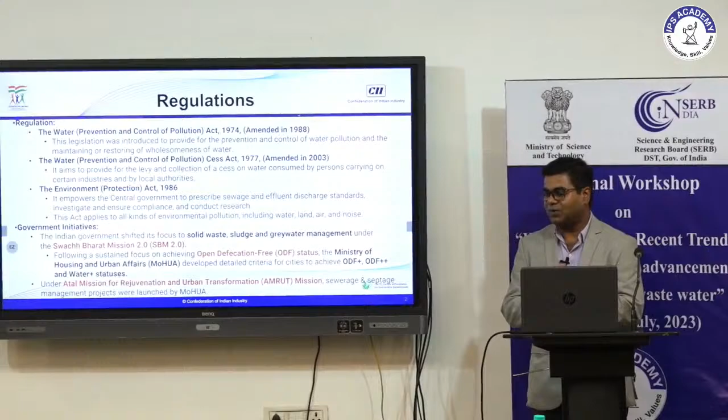So, does anyone know about the difference between different kinds of policies? What is an act, what are rules, what are guidelines, and who made it? If anyone can tell me, what is an act and what are rules, and what is the difference between acts and rules? Anyone? Have you gone through that or thought about that?

No one. No problem, this is the time. Even I didn't know that - I used to think act and rules are the same thing, just people say like that, acts and rules. Then when I grew with the subject, I realized there are differences.

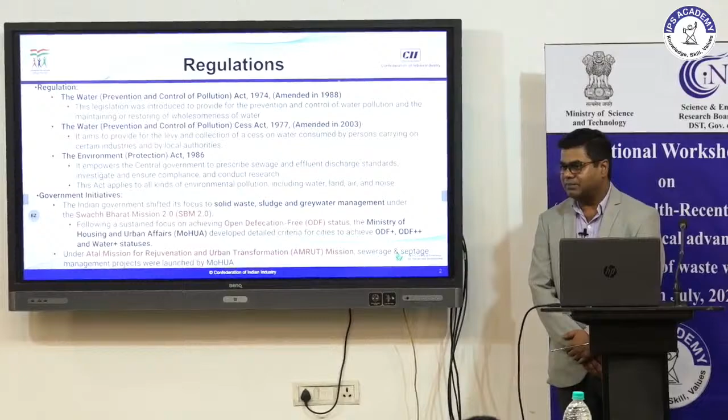So how does an act make policy? Who is the person who makes the policy? Our Parliament and our state government, the state assembly departments, the Vidhan Sabha, and the Parliament of India, Sansad - they prepare the act. So before making the act, the bill is formed - they draft it based on consulting stakeholder inputs. Who are the stakeholders?

So let's understand who are the stakeholders for any policy.

Stakeholders are those who are affected by those policies, those rules. Some are direct stakeholders and some are indirect stakeholders.

For direct stakeholders, if we are going to make some policy with respect to water disposal, who are the stakeholders? Every individual. We use the water, we dispose the water, so we are the stakeholders. Industry, they are using the water, making it, doing the process, and then disposing it. They are the stakeholders.

Based on the stakeholders' input, our parliament makes the policy first in the form of bills. It's called the bill. We used to hear about that. Parliament puts the bill and discusses it, and they come out with the policy. If you guys are aware about environment rules and regulations, I think most of you are civil engineers, but try to understand the background, and then you will be a better engineer, and you can deliver in a better way if you know the background.

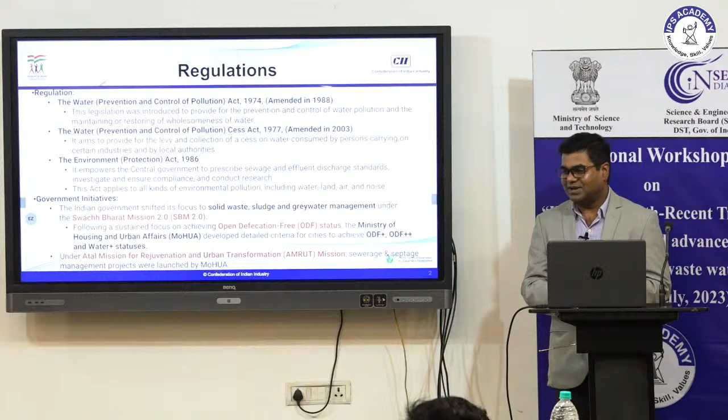We have the Swachh Bharat mission, and we are paying for that. Now GST has come. Before GST, whatever we used to buy, there was a Swachh Bharat tax. So we are paying for that, so we have a right to fulfill it. And then in the last 5 years, the Prime Minister announced open defecation free initiatives, like Har Ghar Toilet, something like that. They have come out with a plan.

AMRUT mission for the city, and all those waste management initiatives started by the Government of India. These are the organizations that particularly work with respect to wastewater, and their responsibility is to implement prevention and pollution control of water.

First is MOHUA, the Ministry of Housing and Urban Affairs. They are at the national level, and their responsibility is to implement the plan. Whatever we see around us, the water treatment plant, wastewater treatment plant, or water conservation plan, all the infrastructure development and its operation is dealt with by this ministry. They also have a state level and a city level, like the mayor and our ULB, the corporation, municipal corporation, comes under that.

Then we have the Ministry of Environment, Forest and Climate Change. They make the rules, particularly what are the limits for disposal, what are the limits for emission, and all those parts. So they are the kind of regulators, licensing organizations. They work through the Central Pollution Control Board, then we have the State Pollution Control Board, and then regional and district pollution control boards.

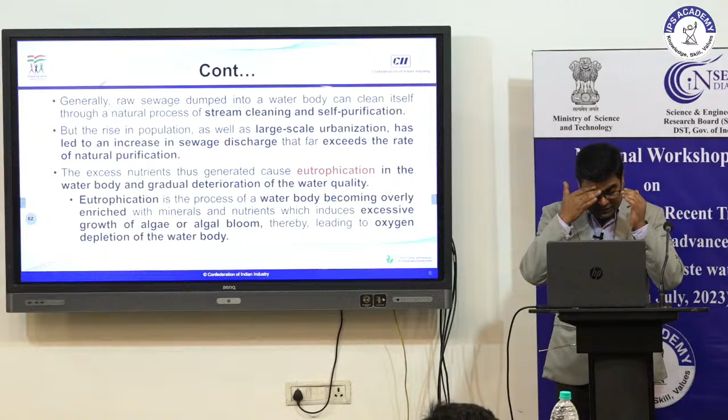So generally what happens is that a water body, particularly a flowing water body or even a large water body, has a healing capacity. Just like when we get a small injury, we feel it will heal in two days - water bodies have that same healing capacity, called self-purification capacity. A small amount of waste that goes into the water body might get diluted, or after some distance of flowing, you can find the pollutant quantity is negligible, because given the travel time and conditions provided, the organic material and pollutants get degraded, and you get good water again. So they have a self-purification capacity.

Today, why are we here talking about this for the last five days? Because that self-healing or self-purification capacity is no more. Every river is converted into a nala. If you go to the coastal line, even at Mumbai's Juhu beach, you can see the black area and all those things. So that's the problem.

The reason behind this is large scale urbanization and the sheer number of people putting pressure on natural resources. The way we are extracting natural resources, and the healing processes, are slow. So that's the situation we are discussing here.

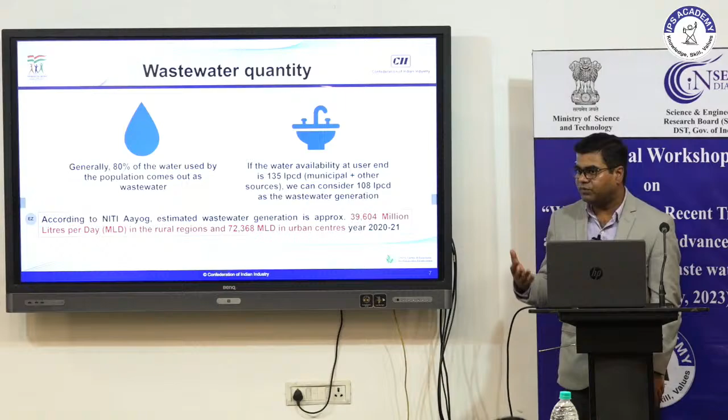But look at the utilization of water: 39,604 million liters per day is the rural requirement. However, for the urban population, which is only 30%, the utilization is almost double. This is not my data - this is data from the Government of India, Niti Aayog, who make the rules and policy for the country. So that's the situation: we are consuming more water compared to the required amount.

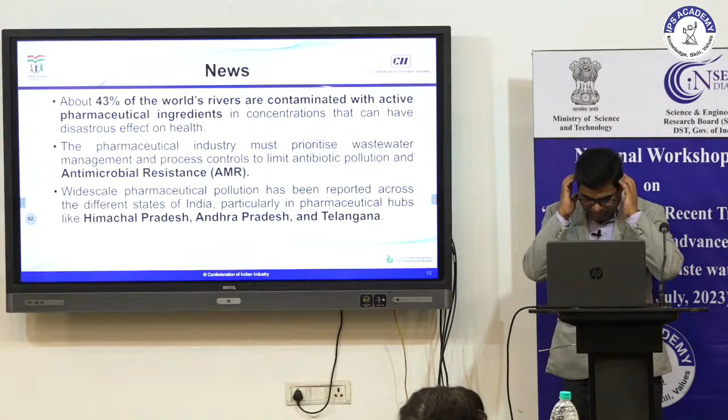We have to understand what antibiotics are - why do we take them? To kill certain biotics, bacteria that are pathogenic or harmful to us. What happens is this wastewater gets disposed into water bodies, and antimicrobial resistance develops - some microorganisms survive despite the antibiotics. Previously we used to have medicines of 100mg, 200mg doses; now we're taking 650mg, 800mg capacity medicines. This is a very alarming condition we have to think about.

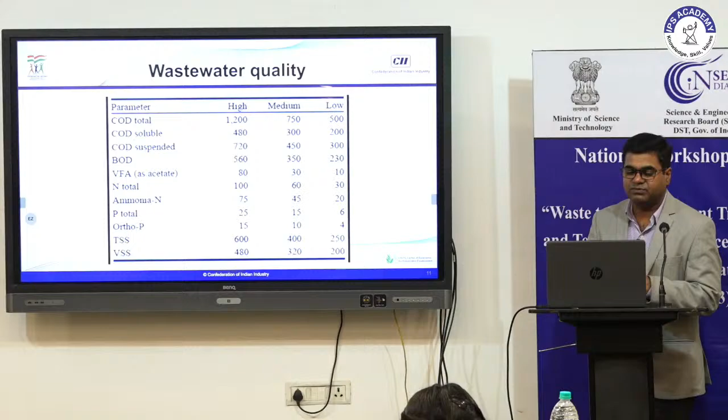This was a big discussion across the world. Generally, wastewater quality has some concentration levels - COD varies from 1200 to 500 mg per liter. These are some other parameters you can see. BOD is 560 to 230 mg per liter.

So what are the treatments? Wastewater treatments - we have a sewage treatment plant, a wastewater treatment plant, and nowadays we have a common effluent treatment plant. These are the water treatment plants we use, and I think all of you have seen in the last 4 years what treatment plants we have.

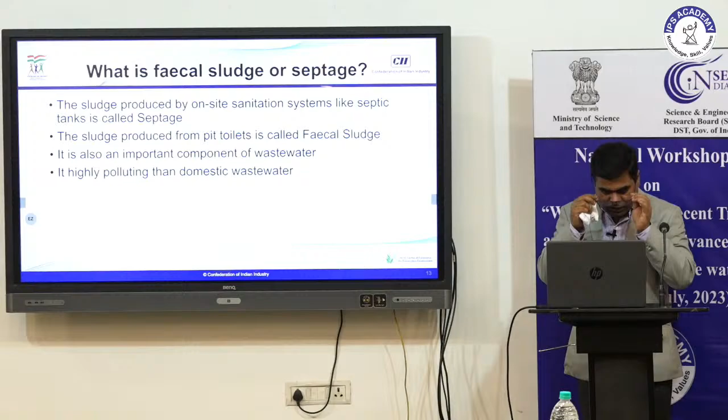I will discuss here much about some unique treatment plant, called fecal sludge or septage, because these are the very basic ones, and based on this we will understand why it's required. At the start of my presentation I said that we have to understand the problem and then we can come out with the solution. This is the very basic one, and we will discuss about that.

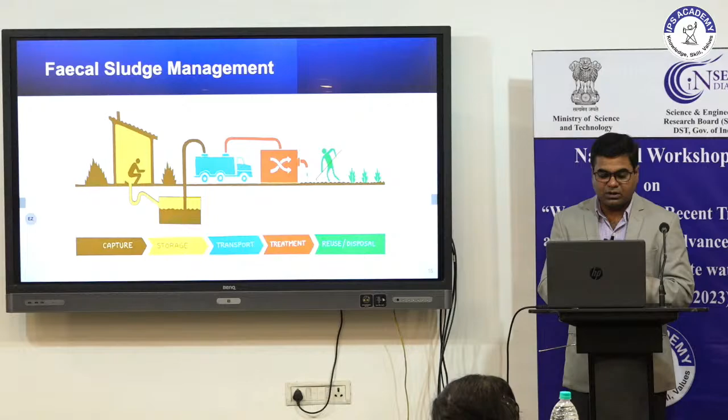Very correct, very correct. So BOD and COD have a very basic difference, I would say.

BOD is the biological oxygen demand - how much oxygen microorganisms require to degrade organic substances in the wastewater. However, COD is a combination of biological and chemical oxygen demand. Some substances, inorganic substances, can be oxidized but are not biological in nature. So that's captured in the COD.

COD is the total oxygen demand - how much oxygen is required to oxidize the complete wastewater. So these are the differences. COD will always be higher. Many times I have seen experienced people write COD 30, BOD 200 - that's data manipulation. So we need to understand the subject.

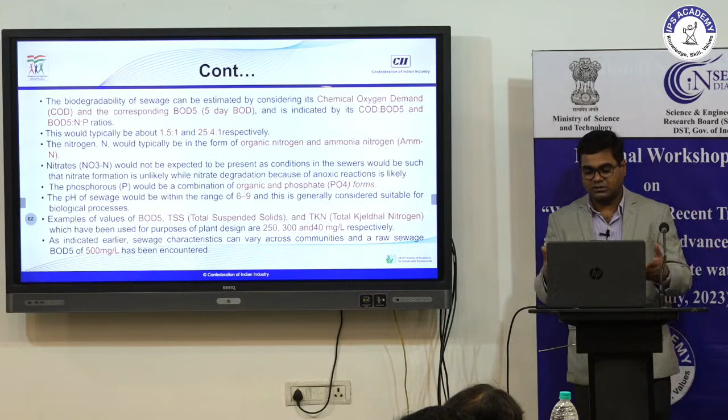Because mostly we produce organic nature in our wastewater. But if you go to industry, particular industries like chemical industries, the COD to BOD ratio could be very vast. The COD might be 5,000, 3,000, 2,000, 1,000, and the BOD could be 100, 200. That's possible because of the chemical nature of the company and the wastewater produced. And then you have to think about that.

In the designing part, where engineers come into the market, what you have to do is understand the background, and then you can design. No, we cannot make a biological treatment plant for wastewater which has a very high COD to BOD ratio.

So, particularly civil engineers - when you go to the design part, the planning part, you should understand these things, what are the requirements for wastewater plant designing and all those things. So these are some typical ratios we have mentioned here.

Other parameters are equally important, like NPK - we can say that for our crops and all those things. When we go for agricultural activity or in our garden, we say we need some urea, and along with the urea we need some phosphorus and other nutrients as well. So these are the NPK ratio, NP ratio, BOD and nitrogen and phosphorus ratio. This ratio is required to design a plant.

And for treatment understanding, there are different methods to analyze it, which I have mentioned. pH is another factor we have discussed. Generally the sewage, whatever the sewage or municipal wastewater, pH varies from 6 to 9. However, in industrial wastewater, the pH could be 1 or 14 as well. It depends on the process they have. And in any kind of treatment activity...

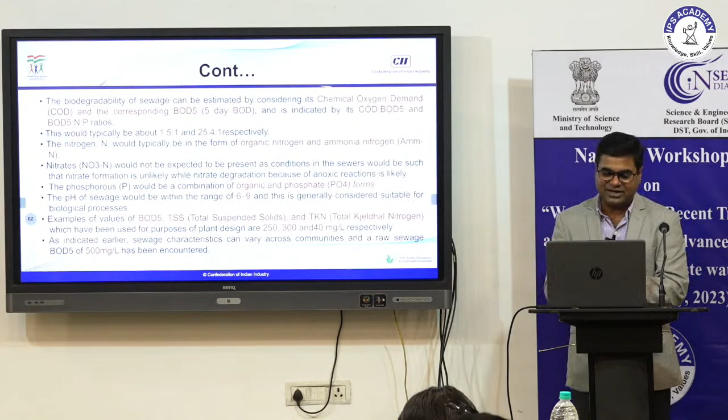Depending on the pH condition, we can design the treatment and all those parts. So these are some values I have identified and given here. Then I think I'll parallelly discuss the industrial scenario, which is different.

Industry could have a flow of water in a different way, like if they have shifts, or if some industries only work in the daytime. So at night there is no flow, and in daytime there is so much flow of water. So the treatment plant, it's a machine, I would say.

It should be designed for idle conditions and running conditions - how will it work. And it's a continuous process. Treatment is a continuous process. It's not like our car, where we have fuel, we start it, and then keep it and start again next day. It's not like that. It's a continuous process.

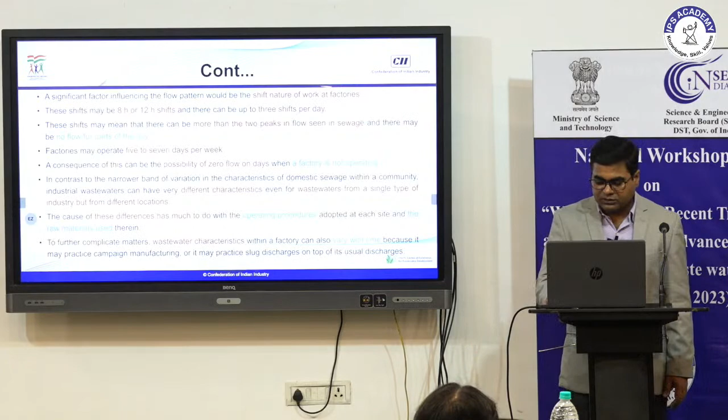So that's the pattern we have to understand when we go for the designing of any wastewater plant.

So these are the different scenarios I have mentioned - in some urban areas there is only residence, in some urban areas there is residence plus small industry. Even in Indore, if you go to some commercial areas, there are so many small industries running in houses and they are producing wastewater. That's going to the drainage as well. So we have to design accordingly and think about that part as well.

So here are the problems I have mentioned.

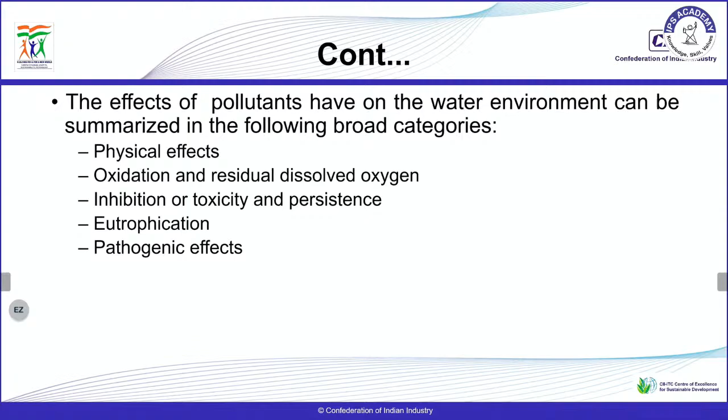So I can summarize wastewater - the physical effect depends on solids or time variation, temperature as well. So those are the different kinds of physical oxidation, residual dissolved oxygen, BOD and COD we have discussed. Every wastewater has different characteristics that we have to think about. Toxicity - maybe some wastewater, all parameters are good, but there is some toxic substance that kills all the microorganisms and your treatment plant could fail. So those are important parts we have to look at as well. Eutrophication we have discussed, and pathogenic effect that everyone knows about.

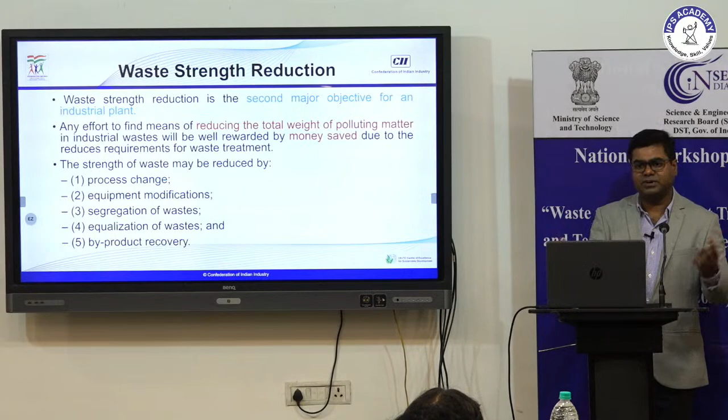What is the motivation? I don't know, you guys are at a very early stage. What is the world doing today, particularly in the industry sector? All industry, all development and everything, everyone is speaking about circularity, circular ecosystem, closing the loop, stopping the linear approach and closing the loop.

What is this linear and circular model? Let me explain it in a very simple way. Some products we manufacture, we use, and throw away - that's linear. Some products we produce, we use, we treat nicely, and reuse again.

That's called circular. Today across the world, every industry, if you read news articles about industry, they are speaking about circularity, sustainability, ESG. Why? Every industry has set a target goal.

This is a new era, not like 10-15 years back. This is the new era. In the last 2-3 years, the world is changing very quickly. Every country has a target to achieve net zero emissions.

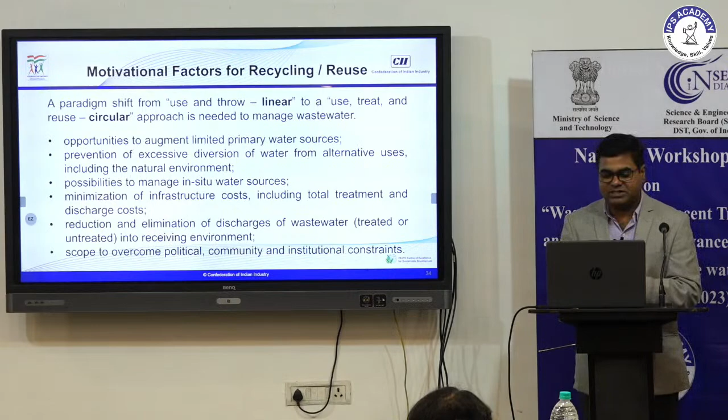So to achieve this, there are different other factors like resources and all those things, which I think I have already discussed, but these are the motivations that bring us to circularity.

Once the wastewater has been treated, reduced, recycled, it should meet standards. CPCB, Central Pollution Control Board, is the agency that made the standards to discharge wastewater or treated water. Whatever the case, there is some regulatory authority for everything. Similarly, for wastewater discharge and disposal, we have the Central Pollution Control Board, who make the standards.

I am a committee member for one of the standards that decide on wastewater disposal and others. A big discussion happened, there is no technology requirement to bring the pH to 7, no technology available to bring pH up to 7. There was a big discussion, 20-30 people, professors, academicians, industry, they discussed and came out with a solution. So these are the standards given for inland disposal, for public use, for on-land disposal, for marine disposal. These standards must be followed before disposing of your treated wastewater.

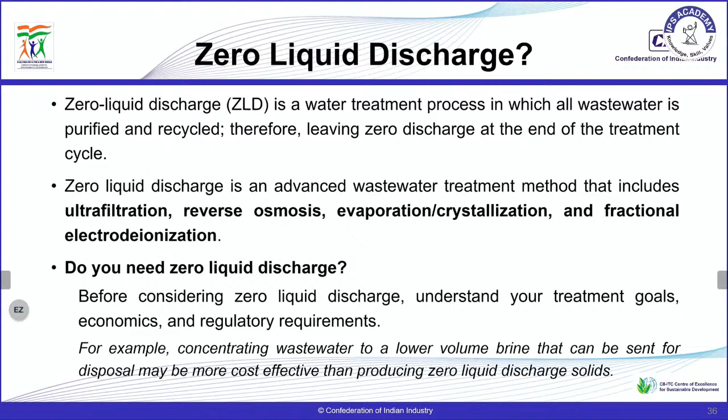Generally, as we discussed, it's a closed loop system. Whatever water we consume, we don't drop any water outside, it circulates in our system. It requires very expensive machines and high power consumption, because it has ultrafiltration, reverse osmosis, evaporation, crystallization, and fractional electrodeionization. All this system is very expensive because it requires lots of energy to run.

We have to decide whether our treatment plant requires the ZLD facility or not, because the cost incurred to establish this technology is very important.

Being a civil engineer or designer, tomorrow you are going to join some organization and somebody blindly comes and says, you know, ZLD, there are so many industries just selling it. They will come and say install ZLD, all problems will be solved. But think about the operation cost. Is that feasible for our industry? I have some small industry and somebody recommends installing ZLD - it's not possible. It's not required as well.

Go to the common effluent treatment plant, send your water to the CETP. So that's what we have to decide.

Some wastewater is very difficult to treat, so ZLD is effective. If you have a very small area, you don't have much area to handle your water, and the wastewater you are generating is very complex, it cannot get treated easily. So you establish this technology, it's very helpful.

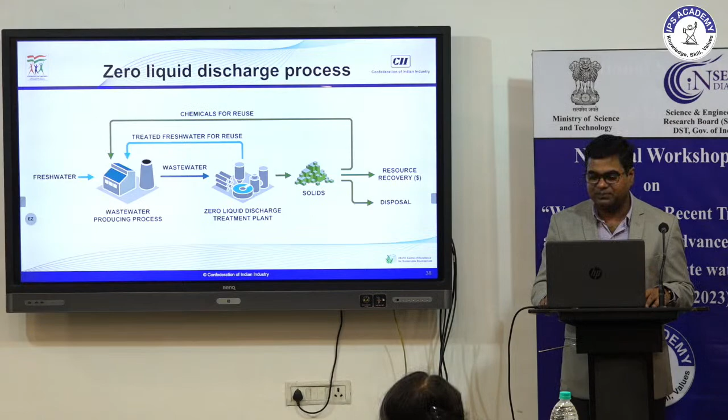The same thing, how it's achieved. The benefits we discussed: it lowers the volume and the cost associated with waste management, and recycling.

Many regulatory authorities, particularly the State Pollution Control Board, recommend establishing ZLD depending on your wastewater characteristics and location, where your plant is available, and then they recommend adopting the ZLD facility.

Now we are in another section where we can recycle or reuse our wastewater. I found this very interesting - a tree diagram showing wastewater, treated wastewater, it's a kind of resource, and where we can use it.

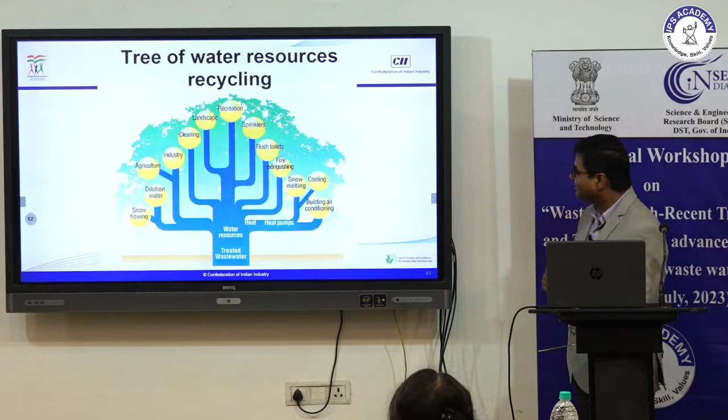You can use it in buildings, air conditioning, cooling, snow melting, fire extinguishing, flushing, toilet flushing, sprinklers, recreation, landscape, cleaning, industry, agriculture. So whatever wastewater we generate, we can utilize 100%. It's a very resourceful material.

The only problem is that we don't have the mindset, we don't want to take the one extra step. Many industries have a treatment plant and there's a little extra cost to send the water for some recreational purposes, but they say no, we will just discharge it. That's the problem - otherwise you can utilize 100% of the water.

In the urban area where we can reuse the treated wastewater, particularly in our city, most big cities have a golf course. They can use this treated wastewater. Residential, landscaping, and field areas - there we can use it. School yards, like our university here, you can see there is a lot of landscape where you can dispose of your treated wastewater, not raw wastewater.

Office parks, highway medians - nowadays we have very good highways. It's really surprising, this country is moving fast, it's better than the US sometimes, the highway quality and the way they have made it. In between the highways, since they are so broad, they are planting big trees, and they can use this wastewater there.

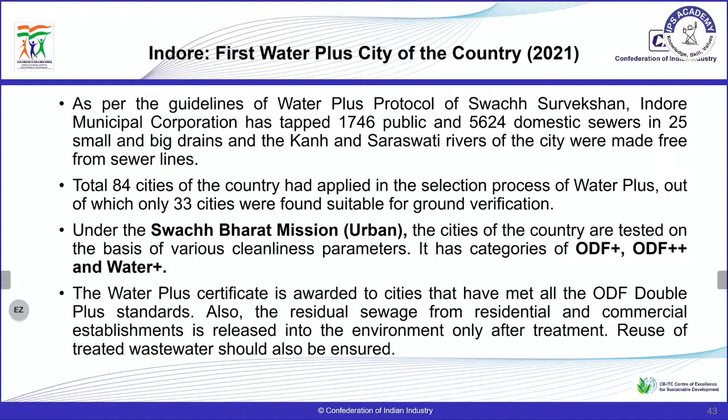Once you get recognized, you have a responsibility to behave like that. You cannot throw untreated water here and there, otherwise people will ask how you got the recognition. So they have to behave accordingly. So Indore is the first.

How they achieved this recognition, all of you from Indore must know and feel proud. Even I feel proud, because in many places I give the Indore model as an example with respect to waste management, solid waste management, and water as well.

Industrial reuse: industrial wastewater can be reused in a cooling tower, which requires a good amount of water - we should use treated water there. Boiler feed water, cleaning in industrial sites, process water - electronics industry, prepared food manufacturing process, pulp and paper industry, textile industry - they can use this wastewater, and they are using it as well.

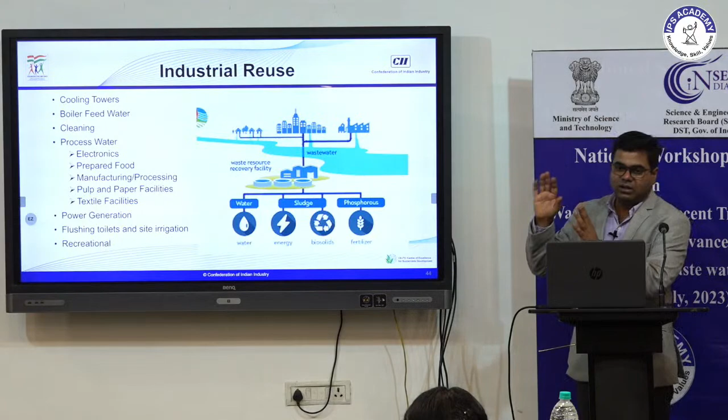The treated wastewater is used for saving on fresh water intake. In power generation also, they are using it for flushing toilets and other purposes, and for recreation as well.

I think I am boring you. So, I'll give some examples from the industry.

Today, almost 100% of industries have a target to become water-neutral. Some industries have a target of 2025, some have a target of 2030, some have a target of 2040 or 2050 - whatever, that depends on the industry process.

Recently I visited an industry for assessment, and I found they are doing a good job. They have become water-positive, because whatever water they extract, they are producing more than that, and you will be surprised how this is possible. There's a little trick we can call whitewash, but how is it possible - if I am using 100 KLD water and producing 110 KLD positive, how is that possible?

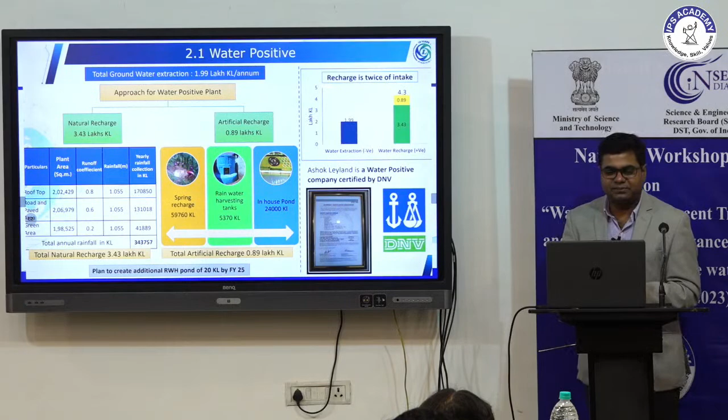It's impossible, but there is some process behind it. They are doing good water recharge, rainwater harvesting, and other conservation measures, and counting that as well. This is the industry - it's Ashok Leyland, I think - yes, this industry is in Haridwar, Uttarakhand.

Here they have given the water balance, showing how they are reducing usage and converted from water-negative to water-positive through spring recharge, rainwater harvesting, and in-house ponds. So they have conserved water. In addition, they have a zero liquid discharge facility - whatever wastewater they generate, they recover it, and in addition they are recharging the water, making them water positive.

Where they are using these methods, like the 3M methodology they follow to conserve water.

And one very important thing I would say. Does anyone understand the KPI, key performance indicator?

If you join any organization, generally we join at a junior position, right? A junior engineer or junior manager or assistant manager kind of position. But there are lots of hierarchies there. The top management, in many big companies there is no owner, there are CEOs, MDs, kind of people.

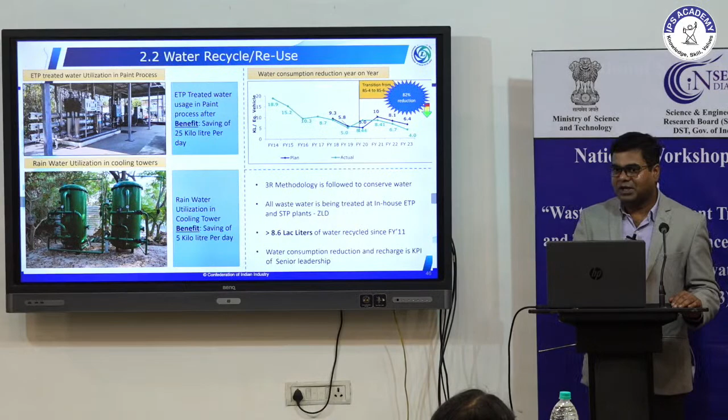They are just employees of the company, but they are the main decision makers, and if they are thinking about water treatment, water utilization, water reuse, then only it can be adopted by everyone. It should start from here. Whatever the decision is, we cannot take it, the principal or top person will take it. So the water conservation plan, the KPI, is the key performance indicator.

Key performance indicators means whatever person is in the company, you have some KPI you have to fulfill in a year. For example, if I am an assistant professor, one of my KPIs is to work on something about water conservation, take a decision, invest some money in water conservation, in addition to my other work. So KPI is in the industry, every person has their KPI.

Even one of my KPIs is to do awareness sessions. I am here delivering this session about wastewater treatment. So that's my KPI. So in any industry, if their top management is taking a decision, then only actual work will happen.

So you people have not been exposed to the industry yet. It's your first stage. It's very good you are listening from me, and you will remember this once you join an organization where they will talk about the KPI. They'll say, these are your 2-3 KPIs.

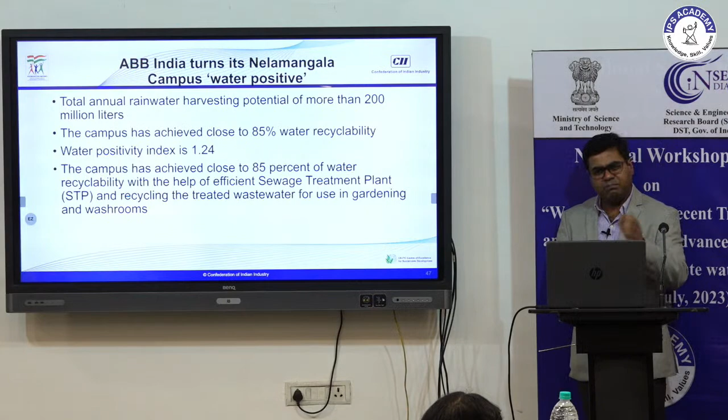People just neglect it, and that water is either leaked or disposed of. It's not a good practice, so that's also very important. Like in our municipal corporations, if you see the water balance, 50 to 60% of water is just going to waste. Somewhere there's a leak, somewhere proper treatment isn't happening, and it just keeps wasting our water.

So they have all these facilities, zero liquid discharge and others, and they are utilizing it well. I would say today every industry has a target. What we can do, being entry level professionals, is keep our minds open and be innovative. Look around you, look around the institutions, and think of something innovative to come up with a new idea.

In traditional wastewater treatment, you can see there is a lot of wastage, we cannot use much of the water. So think innovatively, you are at the entry level. The way I think and the way you think will be completely different. I will think of only one part, this is my concept, this is my way of treatment, I won't go much further. But you have a lot of opportunity to think differently and come up with a good idea.

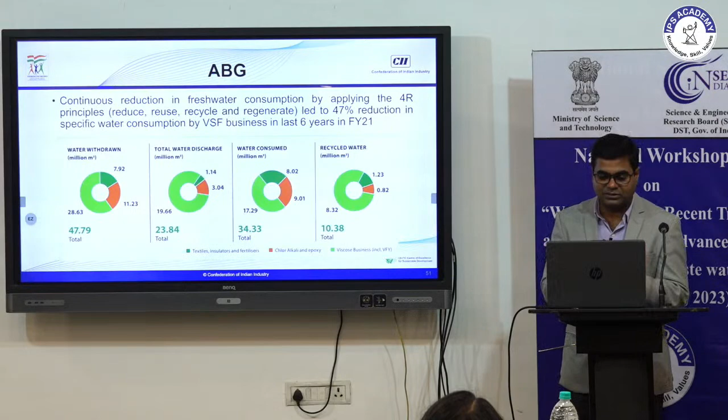Environmental use of water, we know very well, is everywhere. Like we can have a big pond, a recreational pond. We can recharge our groundwater. The factory can use it. So restoring habitats - maybe if we go to some lake, and those lakes are dying because of lack of water, we can, if we have good quality treated water, use it there and regenerate the habitat in wetlands or ponds, because ponds and lakes have their unique ecosystem. It requires protection as well.

Supplementing stream and river flow - in summer, particularly in summer days, many rivers don't have flow, they have zero flow. Go to Delhi, the Yamuna has no flow, there's no water. So treated water can be used there, but currently what's coming there is not treated, so it's converted into a nala. So these are examples where treated water can be used in those parts.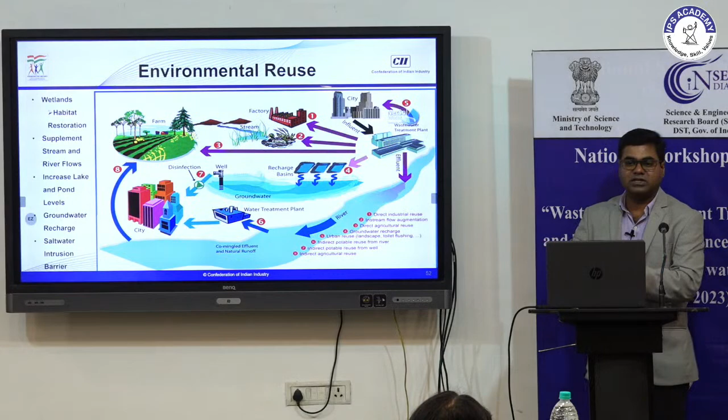Groundwater recharge - another very important use is the salt water intrusion barrier. Particularly in coastal areas, what happens is the groundwater or fresh water body gets extracted, and then the coastal or marine water intrudes and its area keeps increasing. So if we use this treated water in those places, it can stop the water intrusion, the salt water intrusion.

So irrigation has the advantage of closing the loop, as I said previously - a combination of water disposal and water supply. Irrigation reuse is also more advantageous because of the possibility of decreasing the level of purification required, hence saving treatment cost, thanks to the role of soil, crop and biological treatment facility. Very interesting chemistry happens between soil, crop and wastewater - it's very interesting chemistry there.

So I will quickly go through that, and please let me know the time limit for me.

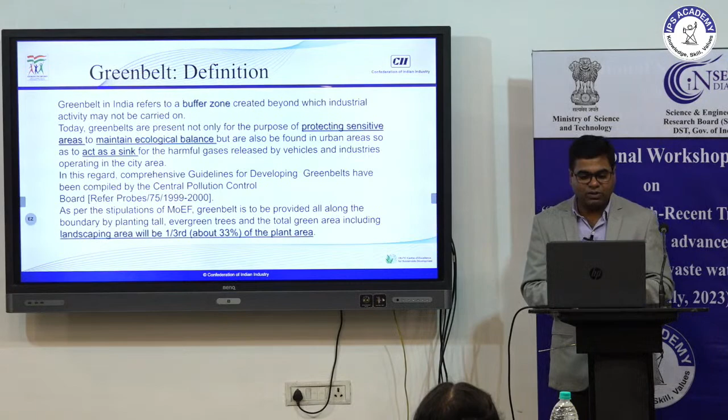Green belt - every industry, every industrial activity, even our housing societies, new housing societies, it's mandatory to have some green belt. Generally industries are mandated to have 33% green belt, because India has a target to have 33% green belt. So that applies everywhere. Whatever construction or activity we are doing, the government has mandated 33% green belt. And we know all the benefits of the green belt. The guidelines are available.

So our rules also recommend having a green belt and utilizing wastewater in a sustainable way, particularly the recycle and reuse part. Every industry or activity has to achieve ZLD, zero liquid discharge. It's not only achievable through high quality RO and other systems - we can adopt other methods as well for achieving zero liquid discharge.

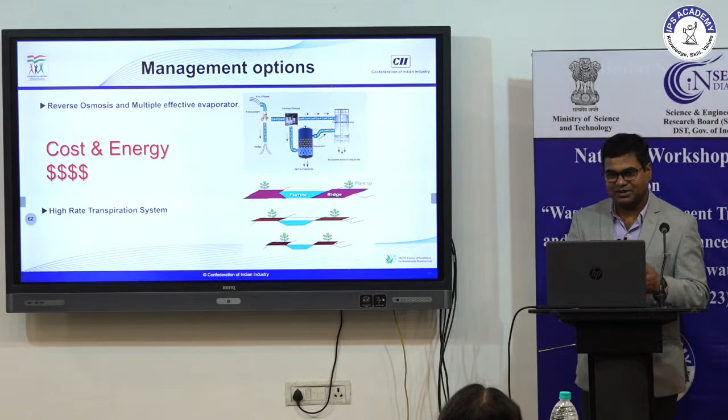NGT has also ordered this, and NEERI has designed this system through their study. So the high rate transpiration system and the reverse osmosis or multiple effect evaporator - to achieve ZLD we have two methods. One is where we can use machinery to do the reverse osmosis process, evaporate all the remaining water, separate the salt, and condense the water. That's very expensive. However, the high rate transpiration system is the combination of soil, plant and wastewater. Utilizing this wastewater, you can achieve zero liquid discharge as well. I will explain a little bit about this in the next slide.

These are the technologies available and the solutions for ZLD - the HRTS, high rate transpiration system, is more effective, as I've explained. CPCB has also recommended the high rate transpiration system for effluent treatment plants, particularly for problematic industries whose wastewater is very complex to treat.

One such industry is the tannery industry. What is the tannery industry, what is their wastewater like? If in future you guys get a chance to visit a tannery industry, next time you will not say you want to go again. It's very smelly - they do the tanning of leather and all those things. It's very smelly, very ugly industry, I would say.

For them, treatment is very complex because they use chrome tanning. I don't know how much you will understand the chrome tanning process, but they use chromium, a toxic metal, for tanning. They take the leather and clean it with chemicals. Those chemicals, after cleaning, end up in the wastewater, and it's very difficult to treat.

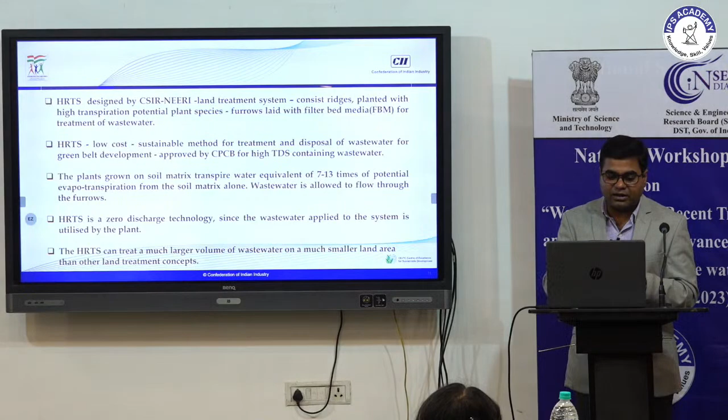The HRTS system is called the land treatment system, where it consists of ridges planted with high transpiration rate potential species, and furrows laid with filter bed media. So they have a special kind of filter bed media in the furrows, and trees planted in the ridges, and then they dispose of complex wastewater, particularly wastewater with high salinity, in that region. The plants have a high capacity to absorb water because their evapotranspiration rate is very high - for example, bamboo.

In one year it can grow very happily, very quickly. So if you plant the bamboo around that, it takes all the water, your water gets utilized, and you get the bamboo as a plant to utilize in your industry wherever you want. So just disposing is another part.

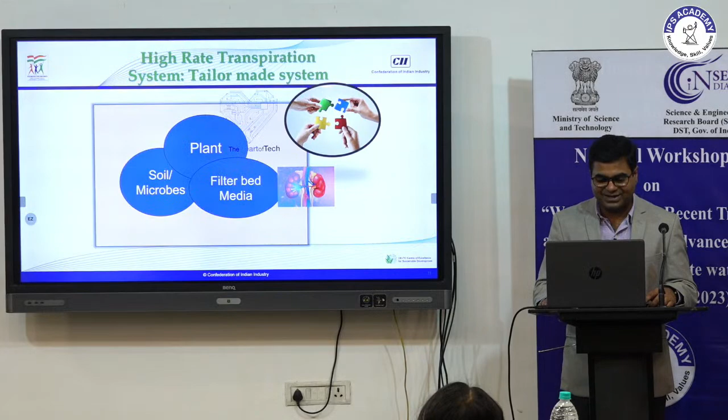So this is the tailor-made solution: the plant, filter bed, media, soil, microbes. All the 6R principles work here - renovate, reuse, regenerate, groundwater recharge, restoration of the land.

This technology has been applied in more than 50 industries in the country, all complex wastewater producing industries. For example, in Madhya Pradesh, there is one pulp and paper industry in Shahdol district - Amlai Orient Paper Mill. They produce wastewater with a high content of lignin, colored wastewater, dark brown in color, and that wastewater treatment is very expensive.

Lignin is one of the substances that could not easily be degraded. That's why I said we have to understand the BOD to COD ratio - we have to dig down to find which specific compound is responsible for the wastewater not being treatable. Because paper is made from tree and plant material, the good part like white paper is extracted after the pulping process, and then lignin and other substances are released into the wastewater. So treatment of this wastewater is very difficult.

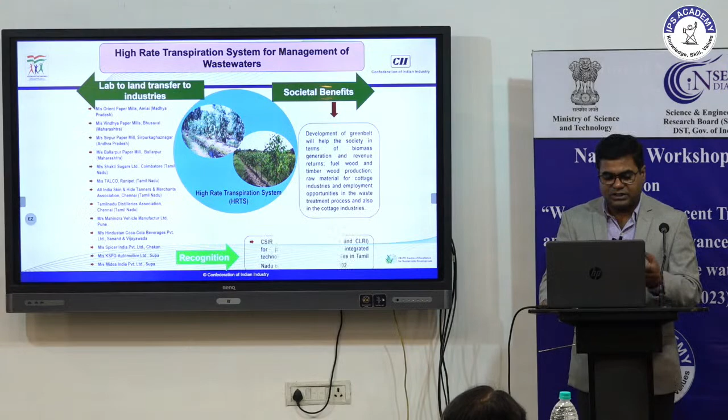So these are some benefits - here they have listed where they have planted.

Before establishing this technology, they tested it in the laboratory, because you guys are very new - you are students. Once you go to industry, you should understand that it's not simple - you can't just say okay, this is the wastewater, this is the technology we are going to use. No, it should first go through a laboratory scale study. In a small bench scale, they do the study, put all the ingredients in, and then identify the effective treatment process to apply at the field. So they did a bench scale, then lab scale, and then plant scale.

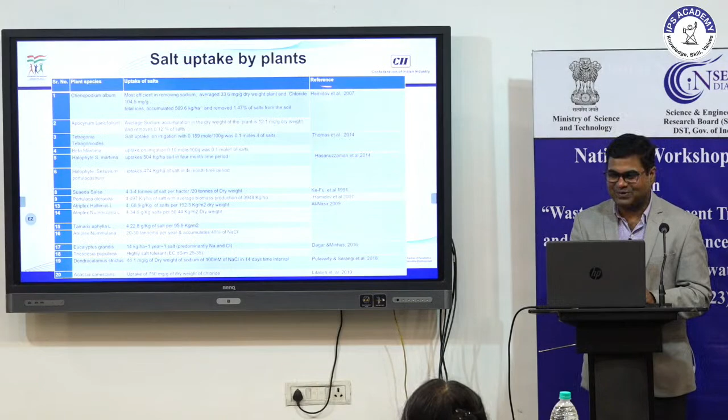So I might have taken 10 minutes extra time, but it was really nice interacting - this is my first time. Generally I speak in front of industry people who are subject experts, so I don't have to explain basic information like the much higher discussion points - reusing, recycling, and the cost part. But it was very nice interacting with the students. You guys are not from the environment background, you're civil engineers, and you know the difference between BOD and COD - otherwise even environment engineers don't know much about this. So thank you all, this was my last slide.

So I hope you have some questions. I can explain a little.

So in the process of killing the pathogenic microbes, won't the required ones that are necessary also get killed?

जो pathogenic है, जो disease causing microbes हैं, उनके लिए water को treat करना ज़्यादा ज़रूरी है। जब हम उनको treat करेंगे तो जो required microbes हैं वो भी effect होंगे। तो सर फिर कोई ऐसा alternative है जिससे हम बिना effect किए pathogenic microbes को हटा सकें?

That's why the wastewater treatment plant is there. It's a very basic principle. Our sewage contains pathogenic microorganisms and all those kinds of microorganisms, but in the environment not all microorganisms are pathogenic. Out of 100 types of microorganisms, only 5 to 10 types are pathogenic. The rest are good for humans, they are a good requirement.

Yeah, okay. So this is a race towards SDG 6. I hope you are already aware about SDGs - there are around 17 sustainable development goals given by the United Nations, and the target given by them is mostly 2030. But India is far behind in terms of achieving all those SDGs. In terms of wastewater technology though, we will be trying to focus on achieving SDG 6, that is clean water and sanitation, right? So currently I am also leading a group at IIT Indore called STWUTEE, the Sustainable Waste Utilization to Enhance Economy. This is one of the research groups that we have at IIT Indore.

It takes time, my God. Don't we have any remote or something? If we can.

Yeah, I think it is there, but I think it is taking time. Find if there is any alternative.

Moving to India's water demand, we know there are different sources for fresh water. The average annual precipitation is around 4,000 billion cubic meters, out of which the river system is estimated to be around 1869 billion cubic meters. Due to concentration of rains and runoff, only 690 billion cubic meters of water is available for different activities like domestic, industrial, or agriculture. Most fresh water is consumed only for agriculture activities - around 80%. Then it goes to domestic and industry, with domestic around 5%.

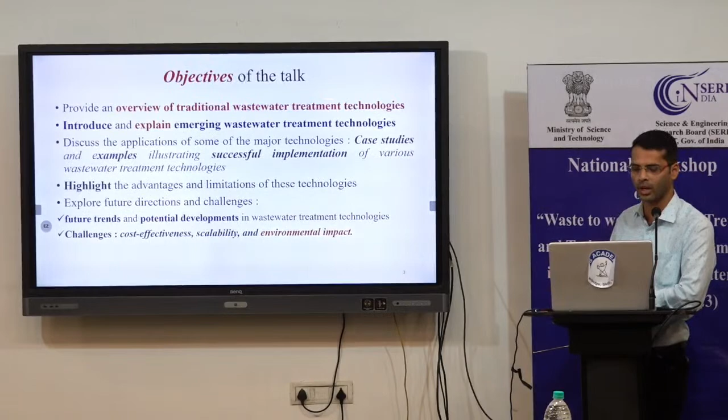Moving further, we'll talk about an overview of traditional wastewater treatment technologies and how they work in India. Then we'll introduce and explain emerging wastewater technologies. There are a lot of advanced technologies coming up, like sequential batch reactor and moving bed bioreactor - different technologies. Some of these are already installed in different IITs so they can understand their efficiency.

We'll also focus on successful implementation through case studies - maybe 1 or 2 we'll go through. We'll highlight the advantages, which is very important, because if we don't understand the pros and cons of a particular technology, we cannot shift to another. We'll also focus on future directions and challenges we'll face, trends and potential developments, and try to understand cost effectiveness, scalability and environmental impact.

If we talk about the definition, I think you already know what wastewater is - it's nothing but water coming from different activities, maybe domestic, industrial, or agriculture. I hope you're already aware of the different parameters that need to be checked when analyzing wastewater. Can anyone tell me what parameters we need to check for wastewater? Third year students, if any are here, can answer.

COD, okay - COD generally comes up when we talk about industrial wastewater. For domestic wastewater, we generally talk about BOD. What about TSS? Yes. What about other parameters? pH, okay. TDS, however, won't be that important for wastewater.

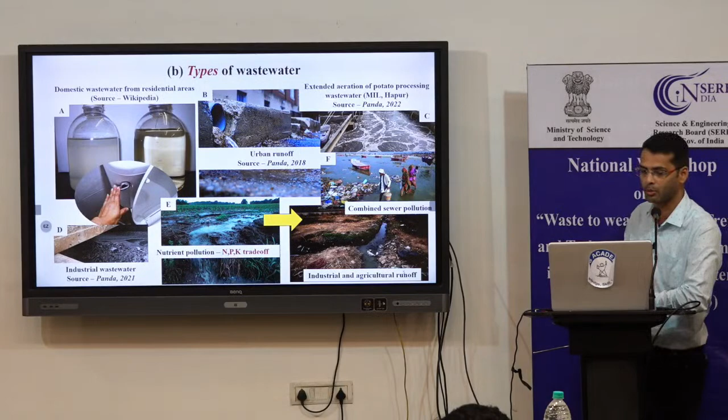That's again a major issue in front of the world, that we are not able to treat microplastics in an appropriate way. There is one study recently published by Professor Subrata Hayat, IIT Patna. He focused on microplastics in rainwater. That's a very challenging thing, because we generally say that rainwater is the purest form of water that can be drunk. But if microplastics are coming in the rainwater, then that is very challenging for the entire world in terms of managing such kind of pollutants.

Coming to conventional wastewater treatment process, we are already aware there are different types of processes: physical, chemical, biological. All those processes are included in the same treatment plant so that the water will be more efficient in terms of either recycling or reuse. We have a preliminary treatment, which is nothing but screens or grit chamber, or mostly screens or primary sedimentation. Then primary treatment, we generally focus on primary sedimentation and grit chamber. Then we have secondary treatment like aeration tanks, and again the secondary clarifier.

We have tertiary treatment that generally includes removal of nutrients. That's again one of the problems we are facing, because we dispose a lot of fertilizers into natural surfaces, and due to fertilizers there will be a lot of nutrients like nitrogen, phosphorus and potassium, and no conventional process can remove those nutrients effectively. At the end, if you want to go for recycling or reuse, then you also have to focus on disinfection, that is the process of killing or removing disease-causing microorganisms.

So for primary treatment, these are some of the design parameters. I will not be focusing on the design parameters, maybe because you are from third year and fourth year, so this will be helpful in terms of advanced design of water and wastewater treatment.

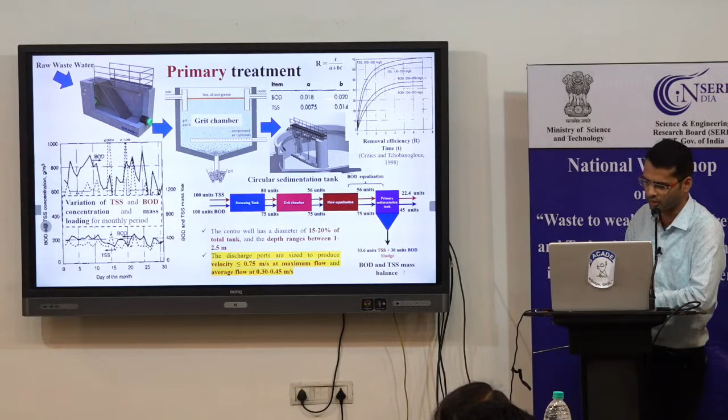Now the parameters have been changed. If you are aware of the disposal parameters, talking about BOD, it's between 5 to 10 mg per liter. If it's more than that you cannot dispose of it. Similarly for TSS, around 30 to 50 mg per liter we can dispose into the river bodies. So again we are not focusing on the design parameters.

Let's talk about the pros. Settling of the material by gravity reduces the load on the secondary treatment facilities. It's cost effective because it does not require more investment in different technologies. It is a more efficient and economical approach to wastewater treatment, and removal of suspended solids can be achieved up to 50 to 70%.

Coming to the cons or disadvantages, there is limited removal of dissolved impurities. So we cannot remove dissolved impurities. For dissolved impurities you have to go for tertiary treatment, maybe reverse osmosis or ultrafiltration or membrane filtration. That can be utilized for the wastewater treatment plant if you want to reuse or recycle it. But otherwise if you are having ROs at your home, please avoid. In Indore, if you are consuming Narmada water, there is no need to put ROs for purification. Ultrafiltration or ultraviolet treatment is sufficient to kill the pathogens.

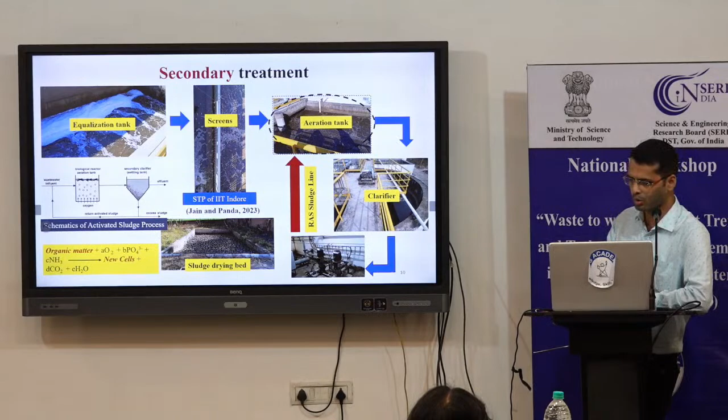You can see that organic matter, there is a chemistry involved: organic matter plus oxygen plus phosphates plus ammonia gives rise to new cells, that is helpful for the degradation of the organic matter, and carbon dioxide and H2O. So this is how the chemical reaction takes place in the treatment plant.

So for the salient features of ASP, no need to focus on when it was developed, but if you are curious, it was developed in 1913. The aeration tank is either in completely mixed condition or plug flow condition. If you want to read more, you can go through the book by Peavy and Rowe, 1985. It's one of the best books, and if you want to understand wastewater treatment better, you can focus on Metcalf and Eddy. We also call it the Gita of wastewater treatment. It's a very good book for understanding how wastewater treatment plants can be designed.

Moving to the next point, these are just some design aspects, I won't be focusing on them. So there are problems with the ASP. There will always be formation of nocardia foam, which is generally formed because of different bacteria called nocardia species. There are problems with bulking of the sludge, and different factors like variation in flow rate and pH affect our treatment plant, and ultimately these types of problems come into existence.

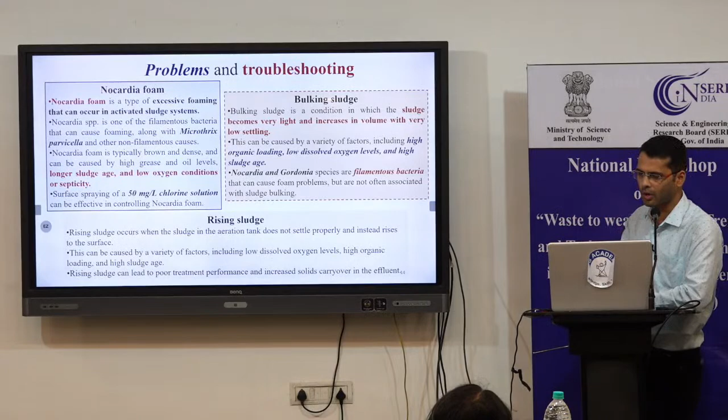So we have to focus on troubleshooting. Most municipal corporations focus on the problems, but they generally do not focus on why these problems are coming. First we have to understand what problem we are having, whether it is nocardia foam, bulking of sludge, or rising sludge. Based on that, we have to troubleshoot it and do the maintenance effectively. I won't focus on how to do the troubleshooting in detail, but this is how we can troubleshoot the different problems that arise during treatment.

Most municipal treatment plants do not have any technology for the removal of nitrogen or phosphorus. That's how biological nutrient removal, or BNR, comes into existence. It is not used for urban wastewater because there is less nitrogen and less phosphorus or ammonia or phosphates coming into the wastewater. But if we want to remove that nitrogen and phosphorus from wastewater, we have to go for a BNR system. There are various technologies based on nitrification and denitrification: the Wuhrmann process, Ludzack-Ettinger, and the four-stage Bardenpho process. These are specially designed only for the removal of nutrients like nitrogen and phosphorus.

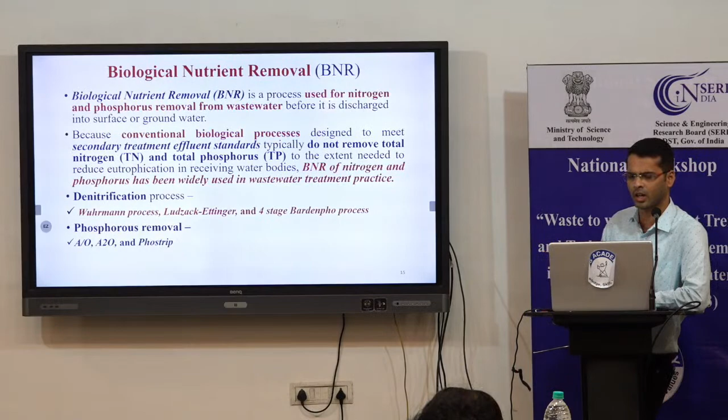So that is something we have to understand, and most of the urban wastewater treatment plants, we do not focus on the removal of the nitrogen and phosphorus, right?

So these are some of the processes. So obviously for designing those treatment plants, we have to focus on the COD by TKN ratio that should be more than 12 to sustain the complete denitrification.

So what happens in this process, पानी आ रहा है, एरोबिक रिएक्टर में नाइट्राइट बन रहा है, नाइट्रेट बन रहा है, नाइट्रेट बनने के बाद उसको डायरेक्टली डिस्पोज करने से अच्छा है हम उसको एनॉक्सिक रिएक्टर देंगे। एनॉक्सिक में वो डीनाइट्रीफाई होगा और ऑटोमेटिकली वहाँ पे आपका नाइट्रोजन लिबरेट हो जाएगा, मतलब नाइट्रोजन गैस बन जाएगा और नाइट्रोजन गैस बनने से वो ऑटोमेटिकली एटमॉस्फेयर में चले जाएगा.

एनीवे इन एटमॉस्फेयर वी हैव अ 78% ऑफ नाइट्रोजन, राइट। सो दैट इज नॉट अफेक्टिंग आवर एटमॉस्फेयर और अफेक्टिंग आवर सिस्टम। एंड एट द एंड व्हाटएवर द इफ्लुएंट विल बी हैविंग, इट विल बी हैविंग अ लेस न्यूट्रिएंट, मतलब लेस नाइट्रोजन रहेगा जो आपके बॉडी को कभी हार्म नहीं करेगा। सो दैट इज हाउ दिस वुरमैन प्रोसेस इज हेल्पफुल.

Now we have a Ludzack, so this is just opposite of that. Sometime what happens, if more nitrogen will be there, it will also affect the secondary clarifier. So हमें वो भी समझना है, इसलिए इन महाशय ने एक नया रिसर्च किया जो है लुड्जैक एटिंगर प्रोसेस बोलते हैं। These are the researchers' name.

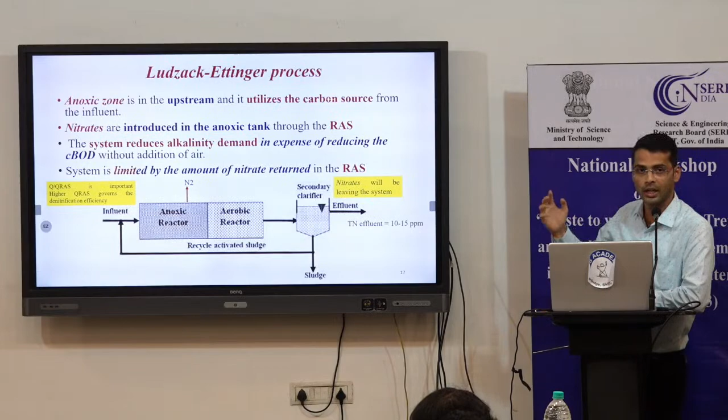So what he has done, he focused on the anoxic first and the aerobic later, right. So anoxic में first क्या होगा कि आपका जो पहले अमोनिया है वो सीधा नाइट्रोजन में कन्वर्ट हो जाएगा, वहाँ से आने के बाद वो नाइट्राइट्स और नाइट्रेट्स क्रिएट करेगा, दैट इज NO2 एंड NO3 एरोबिक रिएक्टर में क्रिएट हो जाएगा। बट अगेन द सेम प्रॉब्लम इज कमिंग दैट इफ यू डिस्पोज मोर नाइट्रेट्स इनटू वाटर बॉडीज इट विल बी हार्मफुल। सो देयर इज अनदर प्रोसेस केम, दैट इज 4-stage Bardenpho process.

This is the best process that has come in terms of the nitrogen removal. You can see that we have anoxic, aerobic, anoxic and aerobic, right. So this entire system is helpful for the complete nitrogen removal from the system, that is from the water body, from the wastewater, right. So that is something which is very important to understand for how the nutrient can be removed from the water bodies.

Okay, there is another problem of the phosphorus. So again coming to the same point that we do not remove phosphorus from the urban municipal wastewater treatment plants, right. So these are the different types of phosphorus that we can see, that is organic phosphorus and polyphosphates, generally coming from the detergents, or maybe sometime it is also coming from the fertilizer company or fertilizer industries.

So obviously those industries have their different wastewater treatment plant, they have separate wastewater treatment plant. But let's say if you are using more detergent, so it will cause formation of the polyphosphates, and ultimately from the polyphosphates it will start scaling on the different pipelines and all the different instruments that we are using. So again that needs to be avoided.

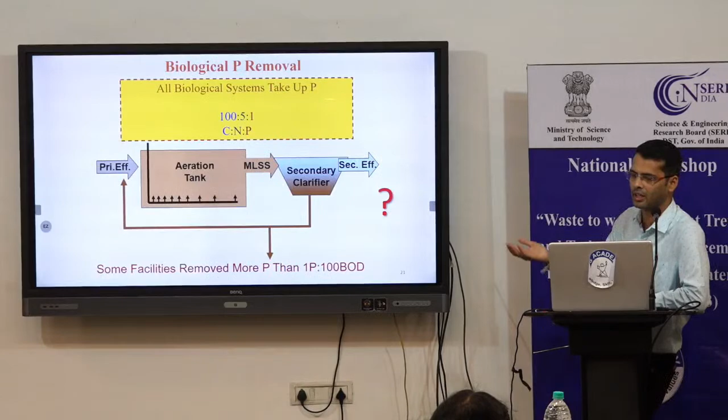So we have different technologies, this is a very common one, ASP, activated sludge process, but we have different technologies like AO process, anaerobic process and oxic process. So here we are focusing on the anaerobic first and then aerobic, and at the end you will be getting a total phosphorus of 1 ppm, and you can see the inlet parameter should be COD by TP should be more than 40:1, right. So that is the requirement for this process, anaerobic and oxic.

And we have another process that is anaerobic A2O, that is anaerobic, anoxic and oxic. So anaerobic is completely anaerobic, then anoxic will be focusing on the nitrogen removal as we have seen earlier, and oxic we will be removing the phosphorus. So this is also one of the technologies that can be used for the removal of phosphorus.

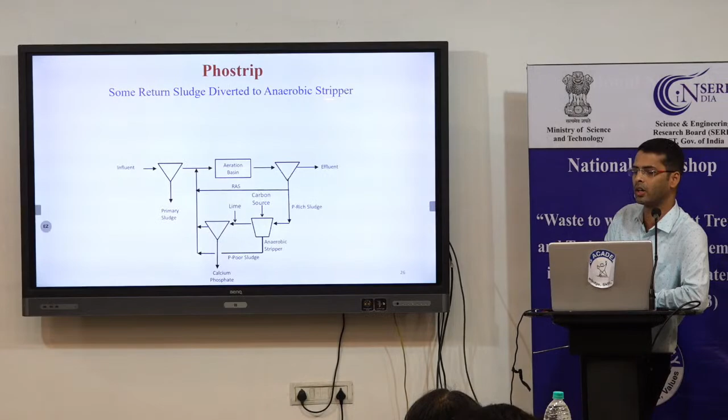We have Phostrip, this is another technology that can be used for removal of phosphorus. We will not go into the depth of how these nutrients can be removed, but it is important to understand that our urban treatment plants are not focusing on the removal of nitrogen and phosphorus, maybe because we do not have as much ammonia or phosphorus coming into our water bodies compared to what different industries have.

Trickling filter, you must have heard of it, it's a very common one, not used mostly in urban bodies, but if the population is less, like in rural areas, you can go for a trickling filter. It is called an attached growth process. There is a biomass, microorganisms that attach to a particular surface, and it starts degrading the organic matter into water bodies.

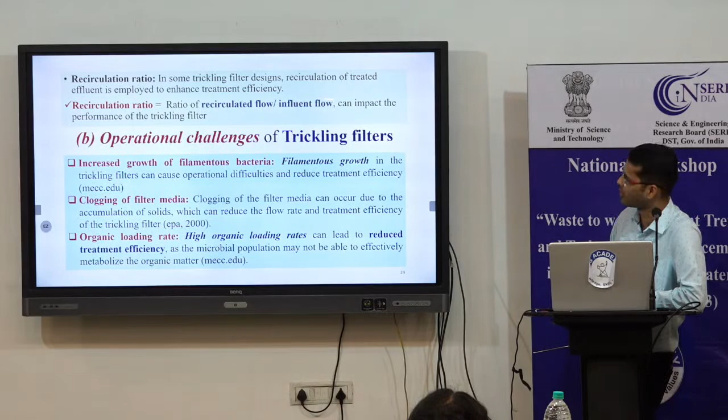So these you can see are the slime growth over the trickling filter media, the media on which a type of slime growth has occurred. So that again will reduce its efficiency.

Coming to the secondary clarifier, you already know that most of the removal occurs in the aeration tank. The next unit after that is nothing but the secondary clarifier. So generally after the secondary clarifier, most of your water becomes clean, I think that is what you might have studied.

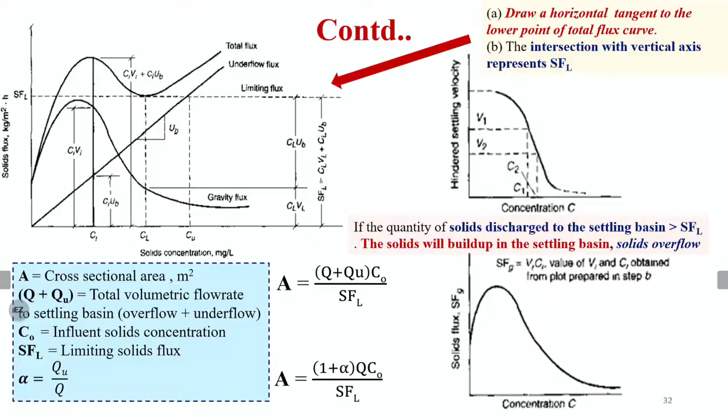But these are again design parameters, what is limited flux, underflow flux, we will not focus on that. But secondary clarifier, most of the urban wastewater treatment plants only go up to the secondary clarifier.

Have you visited any treatment plant in Indore or maybe in other cities? So where have you seen treatment up to? Is there anything beyond the secondary clarifier?

So that's what I am saying, that most urban wastewater treatment plants generally focus on ASP, that is activated sludge process, the conventional one, and they have the last unit as the secondary clarifier. After the secondary clarifier, generally these plants don't provide anything further.

But there is one plant in Piplyahana, if you can visit, 0.5 MLD treatment happens there. So they have ozone and they have disinfection. They are using ozone disinfection for recycling, and whatever water they get, they dispose of in a lake which is just in front of that particular wastewater treatment plant. That is also one of the plants we visited recently for our research purpose.

Anyway, moving on further, filtration. So if you want to go for recycling and reuse, you can also go for filtration, that's what we are having at IIT Indore. And once you do the filtration, it can be further utilized for gardening and flushing purposes, not for drinking purposes.

With this filtration you can only use the water for gardening, flushing purposes, and maybe some other small works, but you cannot drink it unless all the TDS can be removed. For that again we have to go for RO or ultra filtration or membrane filtration.

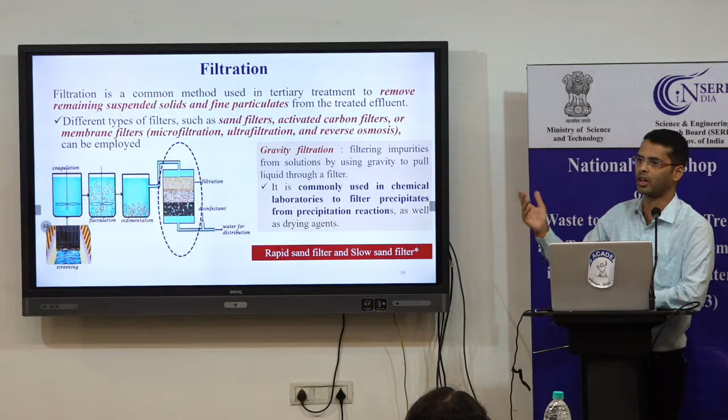Okay, so there are different types of filtration. Activated carbon filter, again it depends on the gravity and the pressure, so we have pressure filters and gravity filters. Again in gravity we have slow sand gravity filters and rapid sand gravity filters, right? You might have studied this in your third year, right?

Okay, coming to membrane filtration, this is the advanced technology like reverse osmosis, membrane filtration, ultra filtration. So we use different membranes to remove most of the dissolved solids. Dissolved solids are nothing but different salts, like what are the different salts?

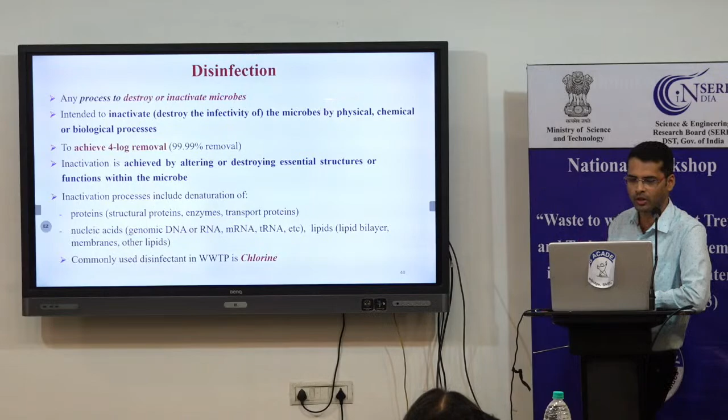Anyway, coming to disinfection, any process to destroy or inactivate microbes. So this is again very important. I think one of the students talked about that some of the microorganisms get killed, and some of the beneficial microorganisms also get killed.

Yeah, so that gets killed, but the biological activities are such that most of the microorganisms, because of the presence of carbon, will automatically start growing once it goes out of the treatment plant, right? Once it's disposed into the river water or surface water. So that is biological and that is not in our control. So even if we are removing those beneficial microorganisms, most of the microorganisms will automatically grow, right? Because they get all the nutrients required for their cell growth, like carbon.

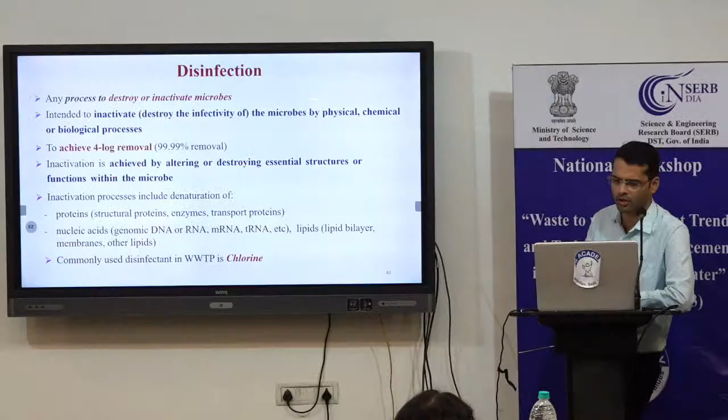Moving further, disinfection we generally do with chlorine, and otherwise we can also do it by means of ozone, and maybe we can do it by means of different methods like chloramines, right, that can also be used for disinfection. So there are different methods by which disinfection can be done. So there are design properties, again we'll not be focusing on the ideal disinfectant.

Okay, so this is another technology, sequential batch reactor. This is advanced technology for removing most of the pollutants. It operates in cycles, different cycles, with each cycle consisting of different phases, right. These phases include the inflow, aeration to promote biological treatment, settling to allow solids, decanting of the clarified effluent, and idle periods for maintenance and preparation for the next cycle.

So this particular technology is very new, although it is being implemented in many places, but still a lot of research is going on regarding the sequential batch reactor, right.

So there are some cons and there are some pros. Cons are nothing but the high maintenance as compared to ASP, that is activated sludge process. You will have less maintenance there, but in SBR you will need a lot of maintenance. Initial cost investment will be more. Skilled supervision is required for maintaining or running these sequential batch reactor plants. Less effective in removing pathogens, again that's a disadvantage, and technical complexity, right.

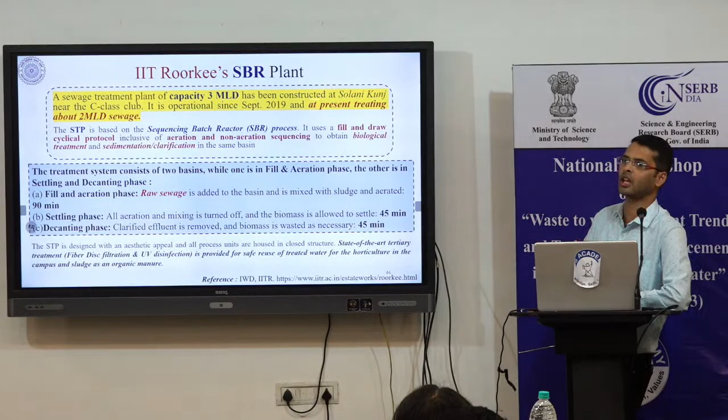IIT Roorkee is one of the institutes in India which has installed a plant of capacity 3 MLD in September 2019, and at present is treating about 2 MLD of sewage. The treatment going on in IIT Roorkee is based on the sequential batch reactor, and they are doing well in terms of the treatment.

Similarly BOD goes straight from 200 to 10. In most ASP processes, we bring it from 200 to only 30 or 40. So that's the advanced technology we have in terms of how different institutes or organizations are using it.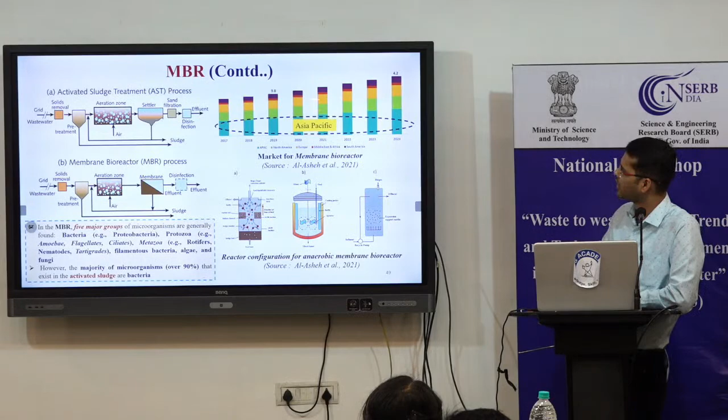There is another technology, membrane bioreactors. These membranes are used for removing pollutants from wastewater. There are studies on how Asian and Pacific countries are focusing on implementation of moving bioreactors and membrane bioreactors. There are some kinetics we won't focus on, and some fouling problems that are generally seen in the membrane.

Again, capital and operational cost will always be more for these advanced technologies. So these may not be meant for the Indian cities, because they have more capex and opex. In general, India has focused more towards economical, cheaper treatment.

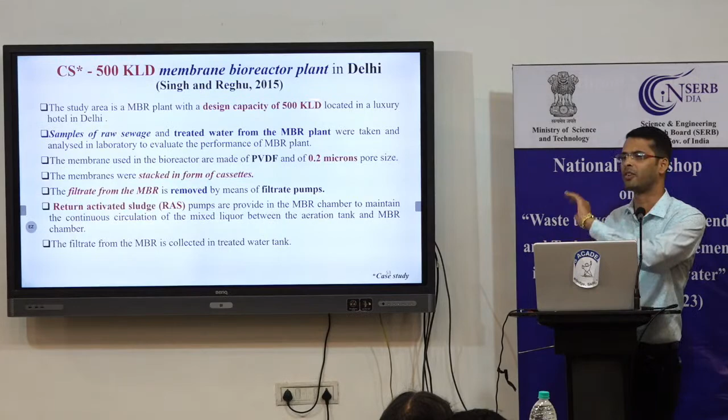These are some of the plants - we still have a 500 KLD membrane bioreactor plant in Delhi. There is one plant running to understand whether MBR is really effective in terms of treatment or not. These are some results from that sample analysis.

BOD COD removal efficiency for this study was 92%, which is very good. When you talk about ASP, we see around 80% or maybe less than 80% in terms of BOD removal. However, in terms of MBR, we see that 92% removal is possible.

TSS removal is 93.9%. Nitrogen phosphorus removal efficiency is not so high in this particular plant. The efficiency of the treatment plant can be increased in ambient plants with proper monitoring of MLSS, that is mixed liquor suspended solids, which we have to maintain up to 3000 mg per liter in the aeration tank.

This is a very new research area, MFCs, that is microbial fuel cell technology. IIT Kharagpur is doing a lot of research in terms of MFCs. There are a few researchers recently focused on the implementation part. Previously it was mostly in the lab, but now they are focusing on implementation.

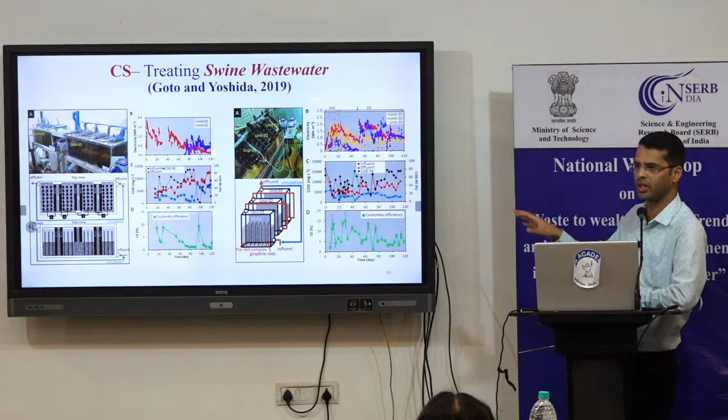There are some pros and cons, and this is one study in Japan which has implemented MFCs, microbial fuel cells. They installed different capacities to treat swine wastewater - wastewater coming from piggery waste, which they tried to treat. The average COD removal efficiency and coulombic efficiency of the scaled up MFCs were less than those of the 1.5 liter MFC. However, the average and maximum volumetric power density of the 100 liter MFC was 0.6 and 2.1.

Comparatively, this is a very new study which has been performed by various researchers throughout India as well as around the world. But again, it's still in the research stage. I won't say it is successful unless and until we understand its efficiency.

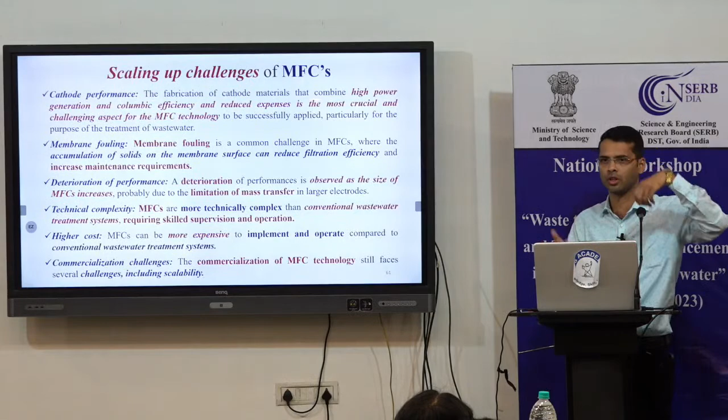So there are some scaling up challenges. You do a lot of research, but the main problem comes in scaling it up. Even in terms of concrete, in different studies, whatever you do - like I was talking about rubber waste, people are using rubber waste in paver blocks - when you do research you may get some good results, but when it comes to implementation or large scale study, it will be difficult to get the same results.

So you have to be very patient in terms of getting those results. Maybe in this time, 4 to 5 years get consumed. A lot of people don't have that much patience. Anyway, so this is all about how the research goes on.

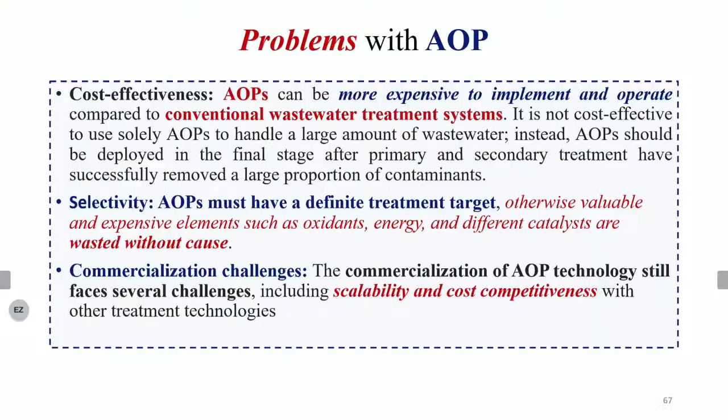So there are different types of methods, like we have an advanced oxidation process in which oxidants are used for removal of pathogens and different pollutants. So we have different types of AOPs, like hydroxyl radical based AOPs. These are nothing but catalysts which help enhance the removal mechanism. We have ozone based AOPs too - these are different oxidants, catalyst oxidants that can be used for removal of different pollutants. We also have Fenton AOPs. So there are various such chemicals available.

Okay, very good. So these are some of the studies. Constructed wetlands are the cheapest one. Natural wetlands - I think you might have studied, you might have heard about constructed wetlands. Earlier it was only research, but now it has been implemented at various places.

There is one professor I know, Professor Shyam Asolekar from IIT Bombay. He has done this study on a very large scale in, I think, Sangli or Satara district. Is anyone from that particular area? No one? Okay.

Anyway, you can go through the websites. You will find they have done it at a very large scale, and it has been very efficient in terms of removal of BOD and most pollutants from wastewater. But there are some limitations with this type of treatment plant - it cannot remove all the pollutants available in the wastewater. But this is the cheapest one we can have, because we are not using any big technology like SBR, MBR or AOPs.

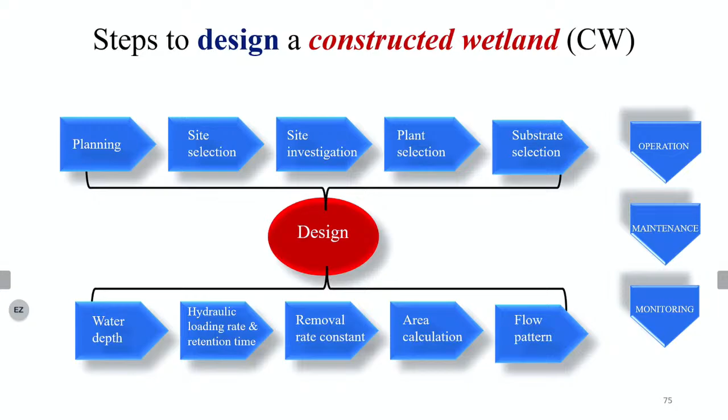Okay, so there are some design parameters for how this design can be - I think I have copied it. If anyone wants to know more, they can go through this presentation, or contact me if they want to know more about how constructed wetlands and all these things work. So this is the design of horizontal flow, and we can also go for vertical flow. So both ways we can do this type of constructed wetland study.

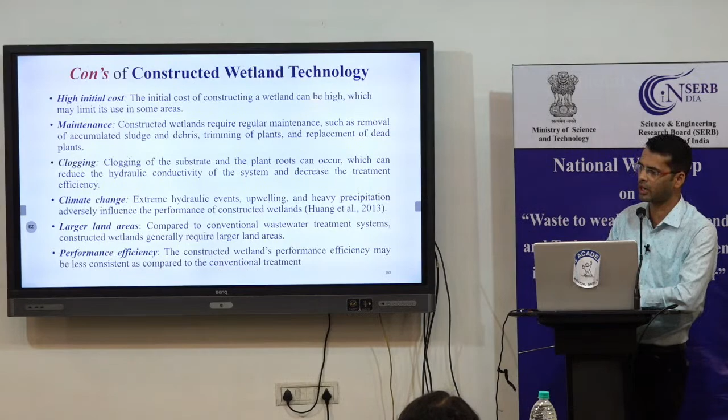There are some liner materials required for this particular wetland bed, so that the water will not leach from the soil to the groundwater. That is again very important. There are also cons - initial cost, maintenance, clogging. Initial cost is high, but if you talk about the longer term, it will be less. That's why constructed wetland technologies are nowadays also used in many industries.

Okay, so what we are doing at IIT Indore, what our research group is doing - we are generally focusing on SDG 6, 7, 11, 12, 13 and 14, and our research is inclined towards these SDGs, including 15. This is one of the studies we conducted recently in Simrol. I hope some of you are aware of Simrol, which is just adjacent to IIT Indore. What we observed is that whatever sewage is being generated from that particular area, from the rural area, they do not have their own treatment plant because it's a rural place.

Generally in rural areas no one pays attention, but in Indore everyone is paying attention. That's the problem we observed - whatever sewage is being generated, they either throw it on the land, causing land pollution, or throw it into the water body, which ultimately causes pollution to both land and water.

We also collected data from the nearby lake and observed that the lake is already dead - there is no life in it, because they are simply polluting all the water into that lake. At the same time, some people are consuming that lake water for drinking and also using it for irrigation purposes, which is very challenging because we end up eating the same vegetables.

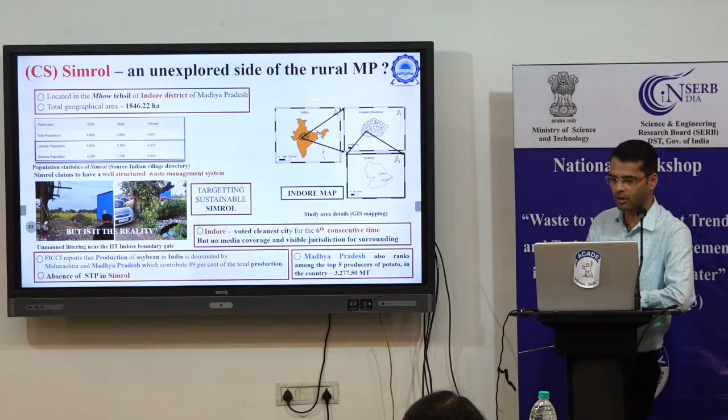So these are the problems we are facing in terms of how Simrol is heading towards sustainability. We did a survey and observed another problem besides the sewage sludge - the burning of agriculture residues. They burn a lot of agriculture residues, and if they burn so much on a daily basis, around 562.94 kg CO2 equivalent is produced.

If you generate so much CO2, what will happen? CO2 is one of the greenhouse gases, GHG. It will cause global warming and climate change. There are a lot of studies done on how this global warming can affect our environment.

On the alternative side, some people in Simrol said they are transporting some of the sludge to the treatment plant. If they transport it 25 kilometers on a daily basis, what happens? Ultimately you are wasting fuel, which causes pollution again, leading to greenhouse gas emissions and global warming. So this is a waste of time, a waste of money, and it affects the environment.

We did a footprint assessment of the plant and understood how it works and how much energy is required to run it. So if I transport sewage sludge from Simrol to a particular plant, I would require some energy to run that plant, which again is not good. That's why we did the footprint assessment and some initial characterization of the sewage sludge.

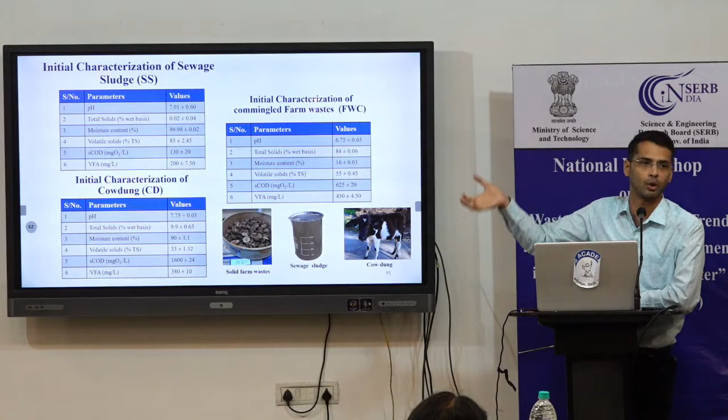This is a lab scale study using 1 liter BMP reactors. BMP stands for biomethane potential - to understand how much gas it can produce, we did this study. We mixed sewage sludge and agriculture waste in different proportions in different bottles.

Very good - it has essential nutrients that help produce biogas, that's why we added cow dung. Anyway, cow dung is not required all the time, but for research purposes we used it. Once the bacteria get acclimatized, we won't need to add cow dung anymore, but to start, to initiate the process, we did that.

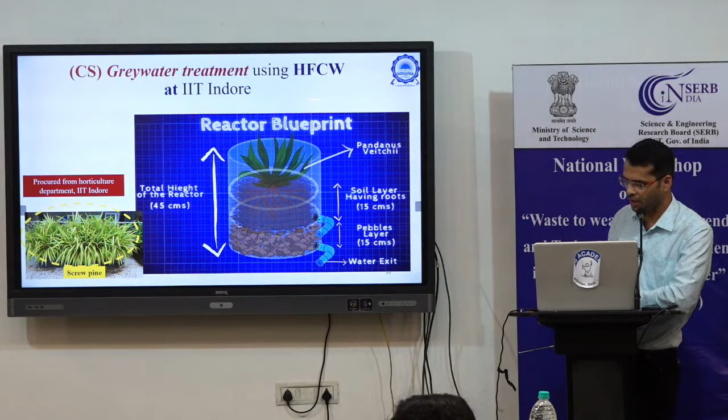आप research के purpose से आपके institute में कर सकते हो। आपको कोई help चाहिए तो I will be always there for the help, right? Yeah, so I think I will stop here.